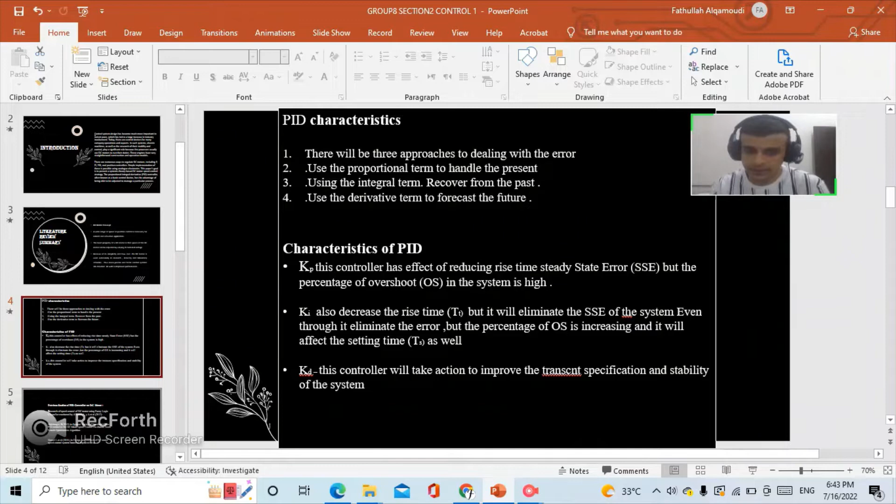So for the last one, Kd - this controller will take action to improve the transient specification and stability of the system.

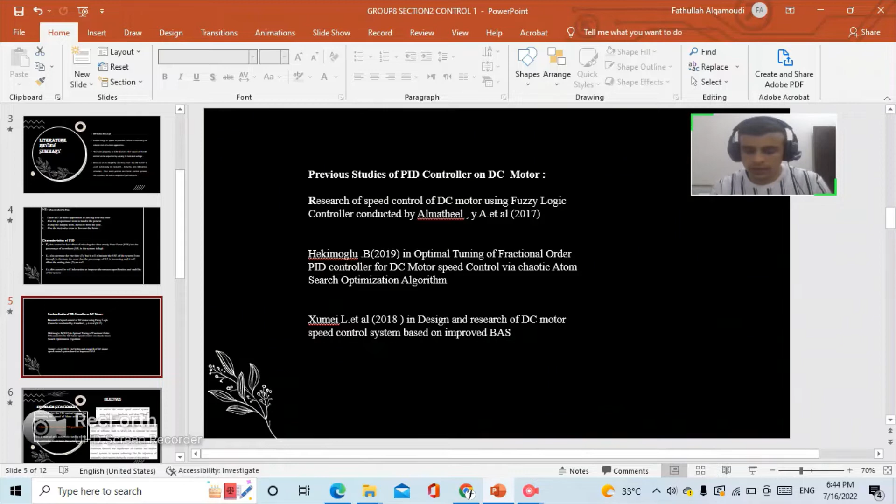Number two, optimal tuning of a fractional order PID controller for DC motor speed control via the chaotic atom search optimization algorithm. The last one: design and research of DC motor speed control system based on the improved BAS.

Problem statement: how to design the PID control system to control the speed of the blade with the DC motor as an actuator.

Secondly, how to determine the PID gain of the system. Third point, does manual and automatic tuning of the PID controller give the same result?

The objective of this project is to resolve the motor speed control system using the theory, methods, and ideas covered in class lectures.

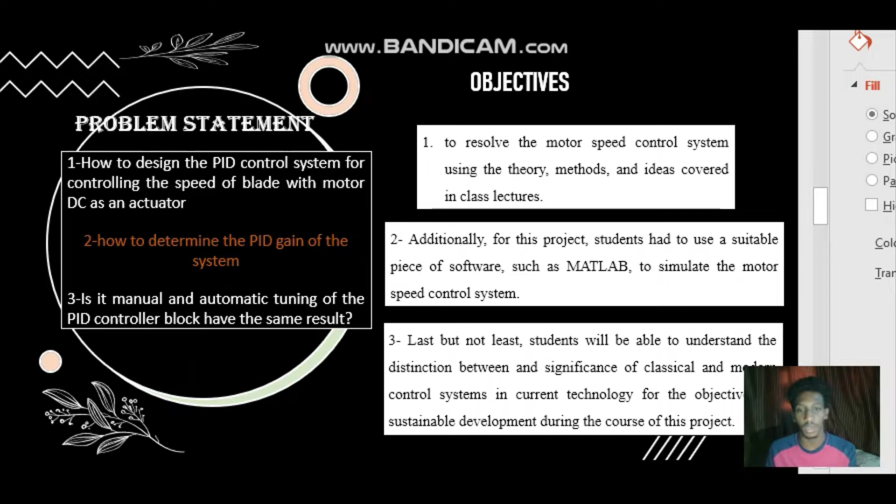Additionally, for this project, students had to use suitable software such as MATLAB to simulate the motor speed control system. Last but not least, students will be able to understand the distinctions between and significance of classical and modern control systems in current technology, for the objective of sustainable development during the course of this project.

The methodology to execute our problem: we provide a methodology in flowchart form, starting with establishing project goals and continuing until we get the actual system to control the speed of the DC motor using a PID controller.

In the project instructions, there is a list of parameters that we must follow to get the results. After results are collected, a discussion will be held among the members.

This is a flowchart of the methodology. The control goal is to control the speed of the blade with a motor DC. Firstly, establish the control goals and identify the variable to be controlled. Then write the specifications.

Then establish the system configuration and obtain a model of the process, then describe a controller and select key parameters to be adjusted. Then optimize the parameters and analyze the performance.

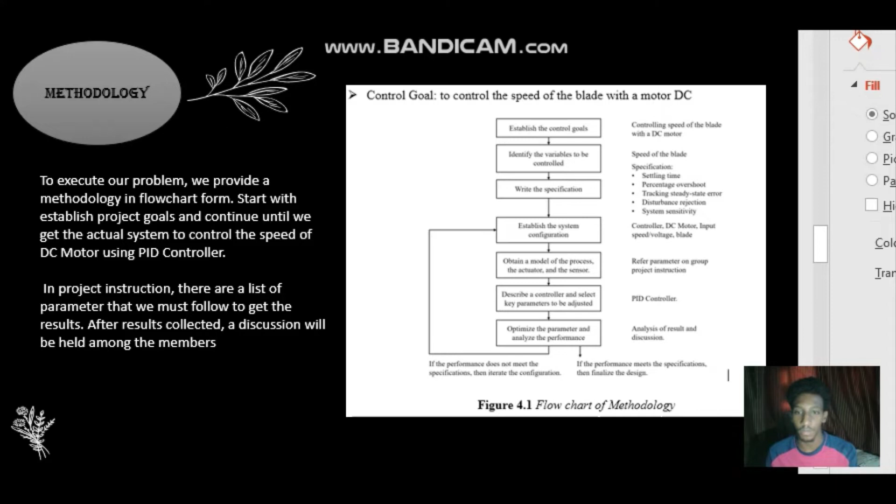And if this performance meets the specifications, then we will proceed with the design.

So here for the part on mathematical modeling of the DC motor. The figure shows us the equivalent circuit of the DC motor.

And the equation VA equals IA RA plus LA dI divided by dt, where VA is armature voltage, IA is armature current, RA is armature resistance, LA is armature inductance, and EA is back EMF voltage.

So here, by substituting E equal to Kb omega T into equation one, the electrical part will be Va t equals IA RA plus LA dIA divided by dt, plus Kb omega T. So for normal operation, the developed torque must be equal to the load torque plus friction and inertia.

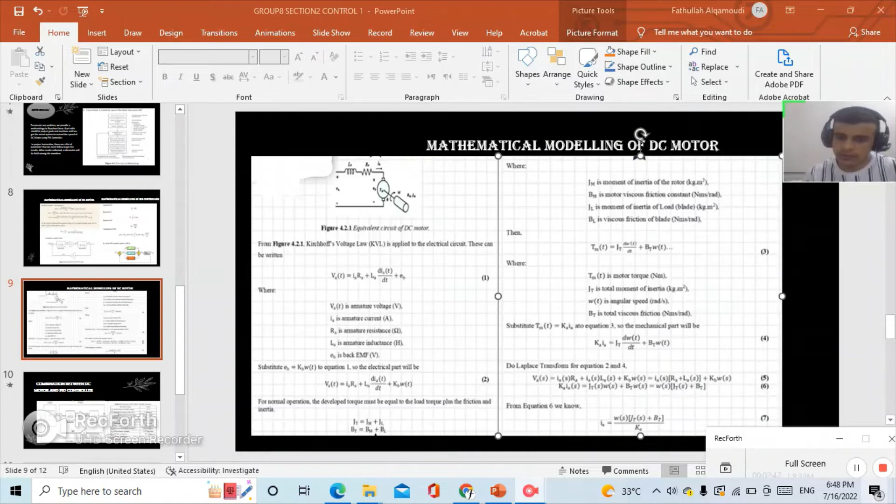Bt is the total friction. So here, substituting the Tm equation, the mathematical model will be Ka IA equals Jt d omega divided by dt plus Bt omega.

Okay, for the combination between the DC motor and PID controller. After we combine the two items, we have a controller and DC motor. We must use a closed loop system, with unity feedback constant, and besides that, I have the parameters used. Okay, that's all.

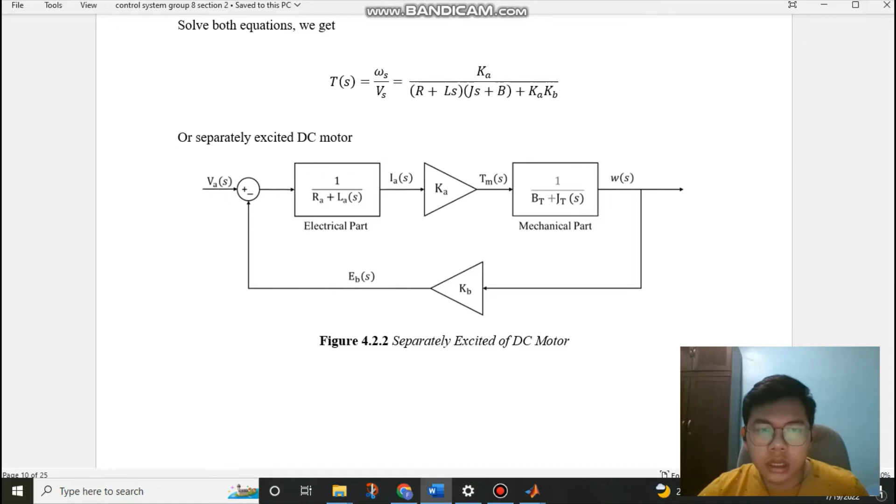So this is the block diagram that we use in our MATLAB to obtain the result and run the simulation. Now I'll explain the parameters of this motor transfer function.

This is the component in the circuit that we use. We have the rated motor terminal voltage, which is 24 volts, the moment of inertia of the rotor, moment of inertia of the load.

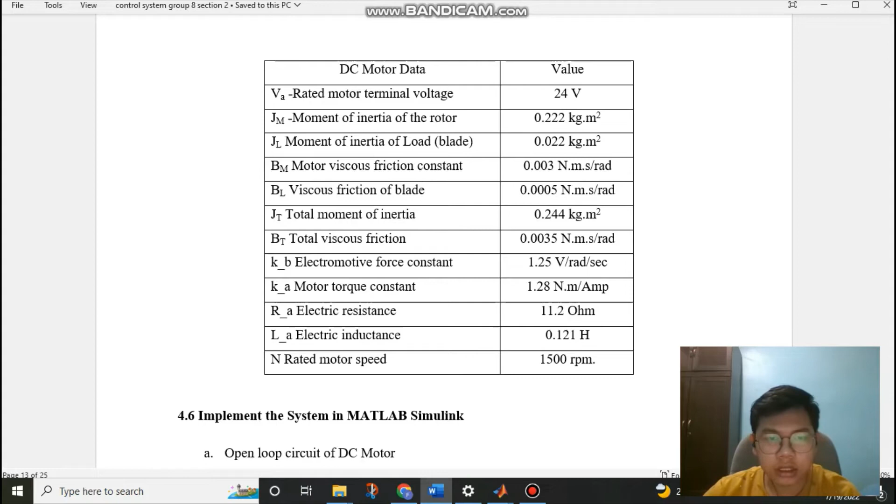Motor viscous friction constant, viscous friction of the load, and total moment of inertia, total viscous friction, the electromotive force constant, which is 1.25 volt per radian per second, and the motor torque constant, electric resistance, and electric inductance, and lastly the rated motor speed, which is 1500 rpm.

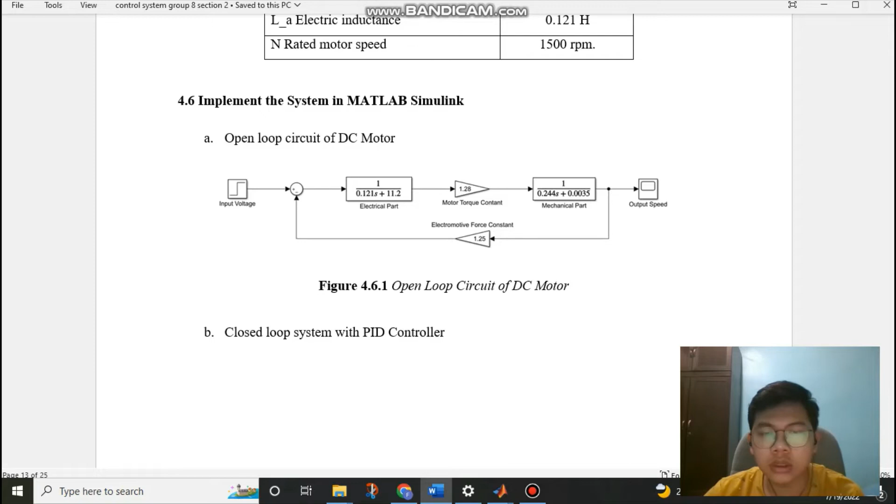So we implement the system in MATLAB Simulink, using this circuit to do the simulation. This is the open loop circuit of the DC motor, and the closed loop system with the PID controller. We just add the PID here to do the simulation.

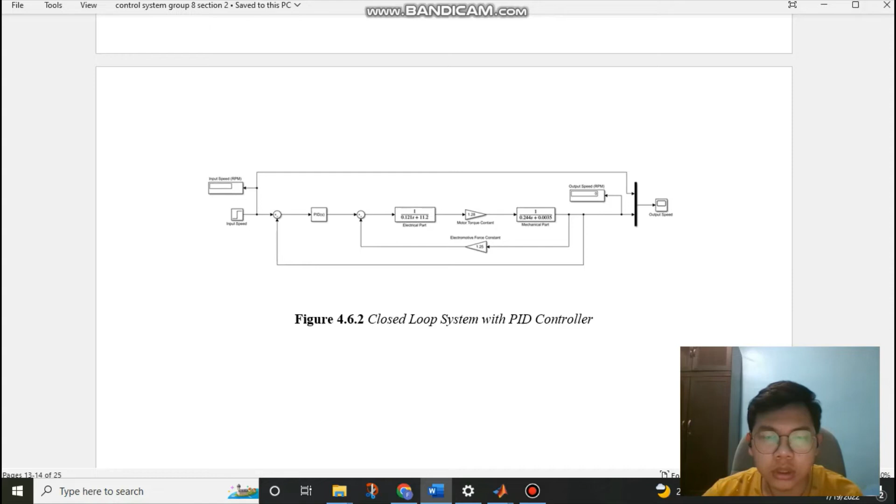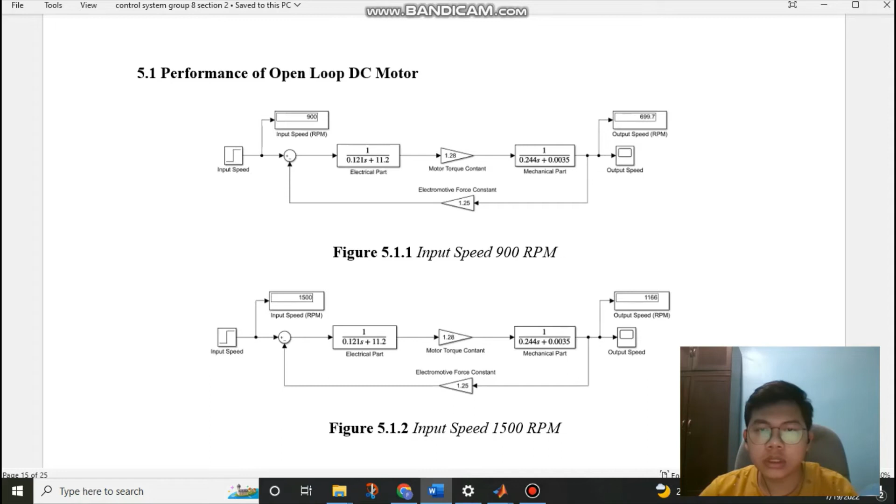So for the results and discussion, the performance of the open loop DC motor: the input speed is 900 rpm. As it goes through the electrical part, the motor torque constant, and the mechanical part, the output seems to be 699.7. And the next one, the input speed is 1500.

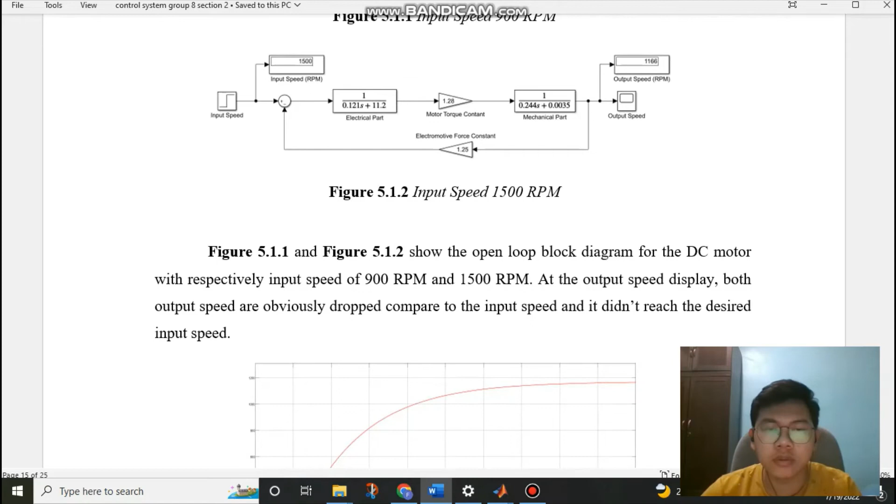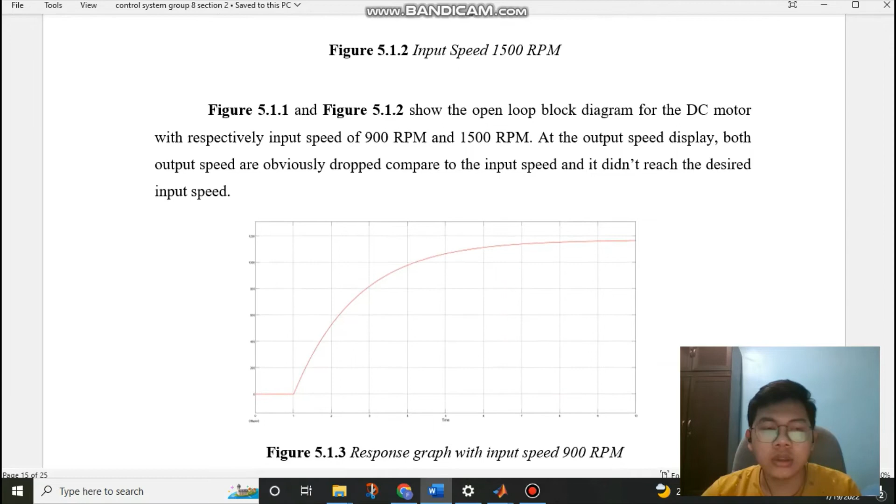So the output speed is 1166. So the open loop block diagram for the DC motor is tested with respective input speeds of 900 rpm and 1500 rpm. Both output speeds obviously drop compared to the input speed, so it did not reach the desired input speed. As you can see, this is the response graph with input speed of 1500 rpm.

As you can see, it did not reach up to 1500. It only reached somewhere between 1000 and 1200 rpm, so it did not reach the input speed.

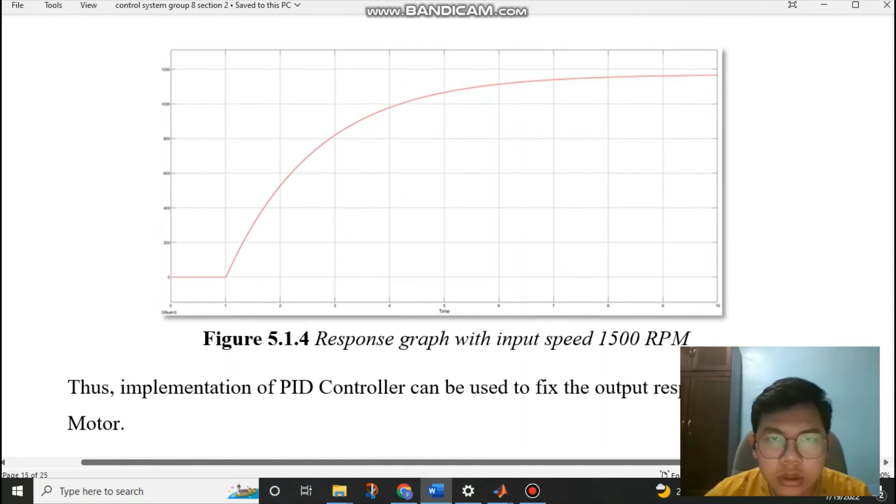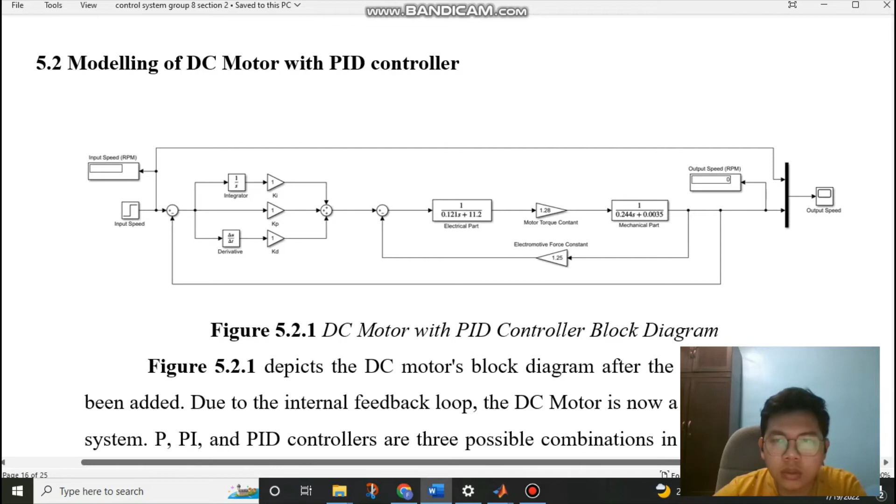So because of that, we use a PID controller for the DC motor to get the output speed that we want matching the input speed, so it reaches the same amount of input speed when we run the simulation. This circuit is basically the closed loop after we add the PID controller.

We use three possible combinations: P, PI, and PID. For the P, the KP is 250. For PI, the KP is 15, TI is 1.5, and KI is 10. For PID, KP is 50, TI is 1.11, KI is 45, TD is 0.06, and KD is 3.

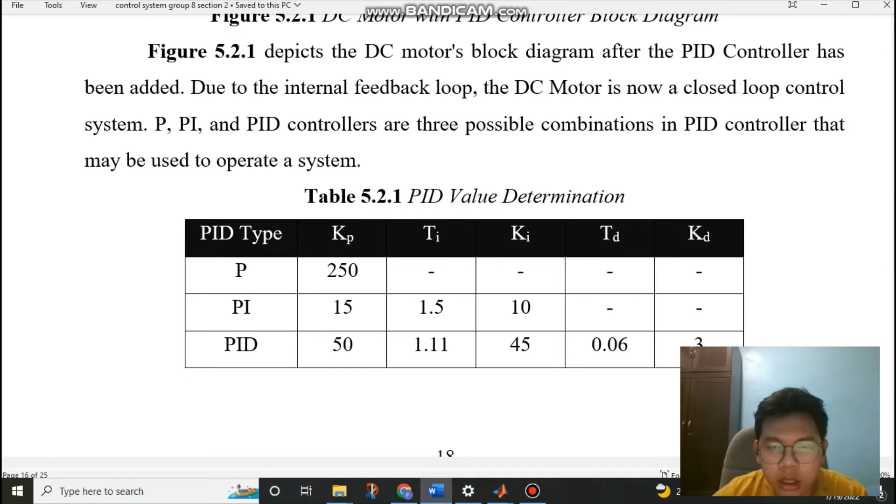We input this value into the simulation into the PID controller to get the result, and we show it into a graph. So this is the graph that we obtain after we run the value in the table before.

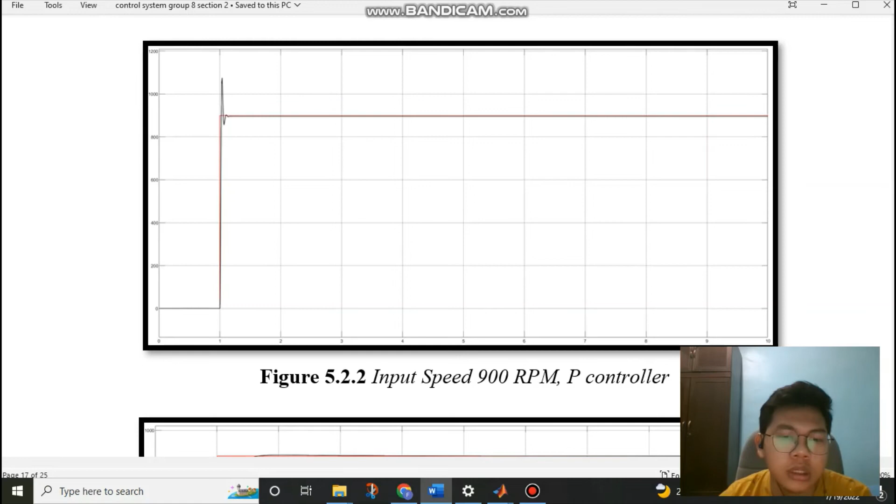The big quantity of KP is used to increase the output speed as much as possible in order to obtain the required speed. So after adding the PI controller, the value of KP may be gradually lowered using the integral controller, since the integral will minimize the steady state error to obtain the desired output, where KP is 15 and KI is 10 for the PI controller.

So last but not least, the PID controller, by adding another derivative controller, which is KP equal to 50, KI 45, and KD to 3, we may extend the response rising and settling times. So the DC motor becomes steady and stable.

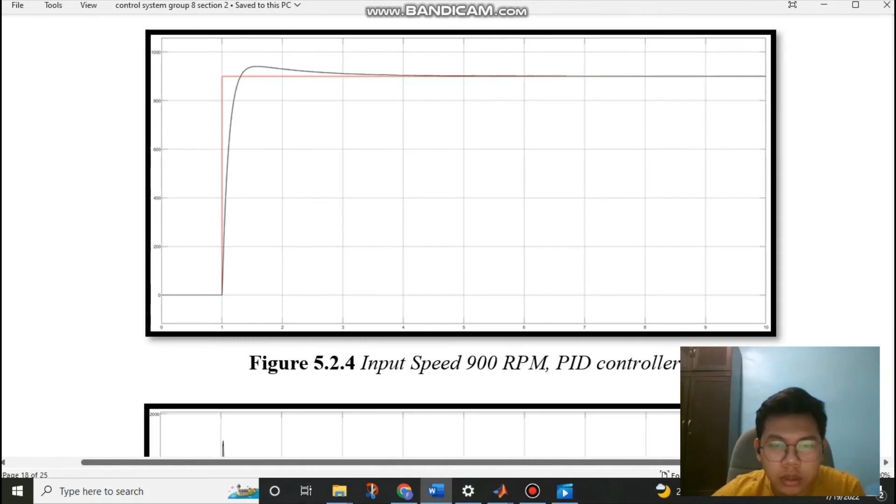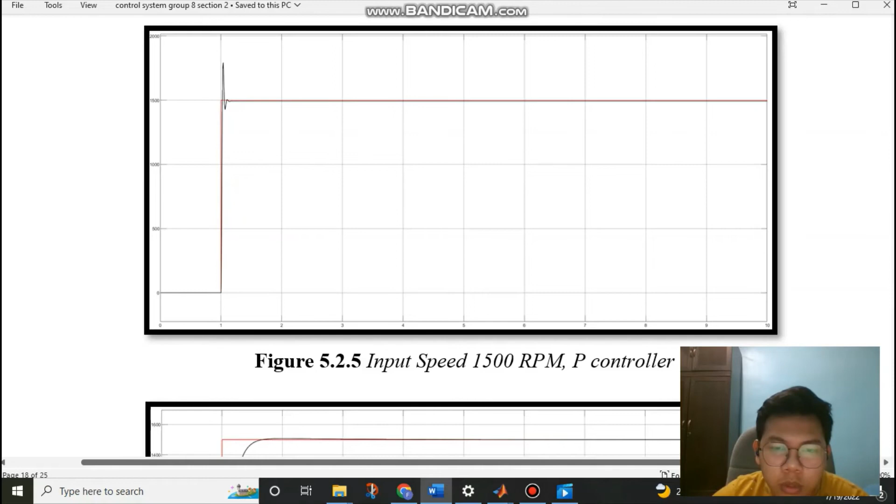So the graph that we obtain from the input speed of 900 rpm seems to be the same as when we use the same controller, which is the P controller, for 1500 rpm. The value overshot a little and then became constant, same as input speed for 900 rpm using the P controller.

So for the PI controller, the value slowly and steadily went up and became constant, while using the PID controller for 1500 rpm, it overshot a little and became constant.

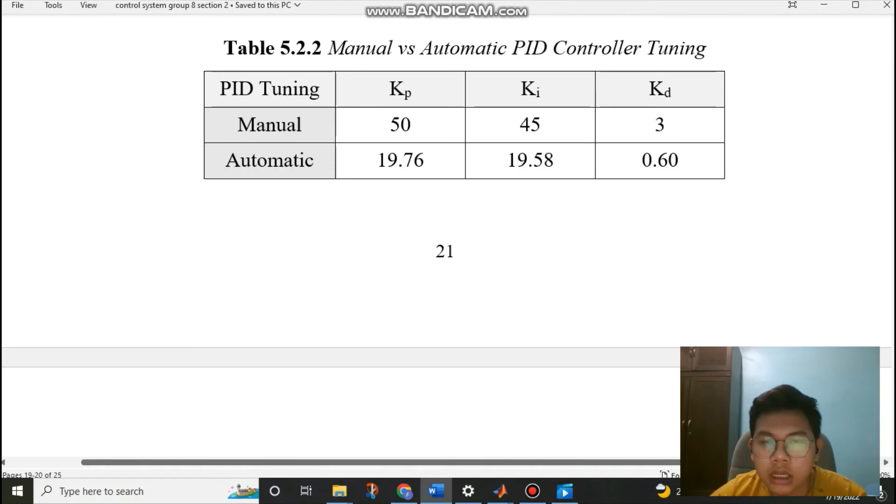We tried to differentiate between manual and automatic PID controller tuning to see which is more precise in calculating the result. For the manual tuning, we use KP 50, KI is 45, while KD is 3. For the automatic, we obtain KP is 19.76, KI is 19.58, and KD is 0.6.

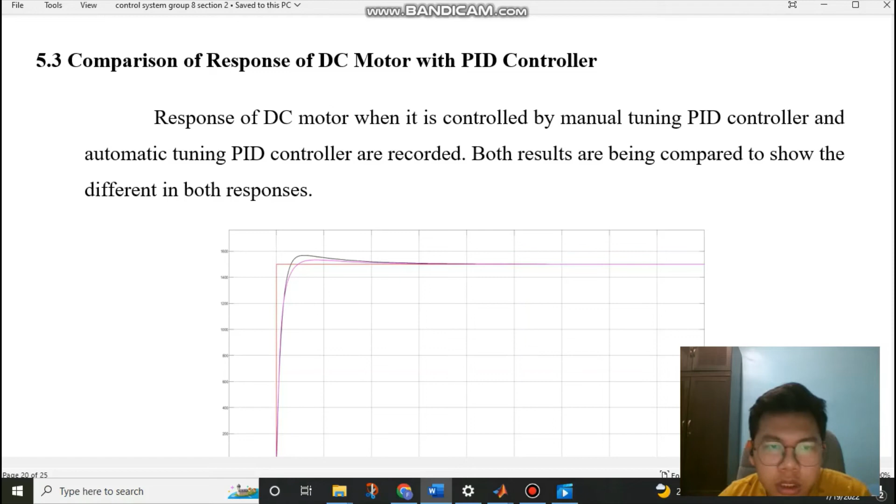This is the result that we compare after inputting the values from the table, comparing the response of the DC motor with PID controller using manual tuning and automatic tuning. In the graph, the black one is the manual tuning and the pink one is the automatic tuning, and the black one overshoots more than the pink one. So we can see that automatic tuning is the best if we want a more precise result.

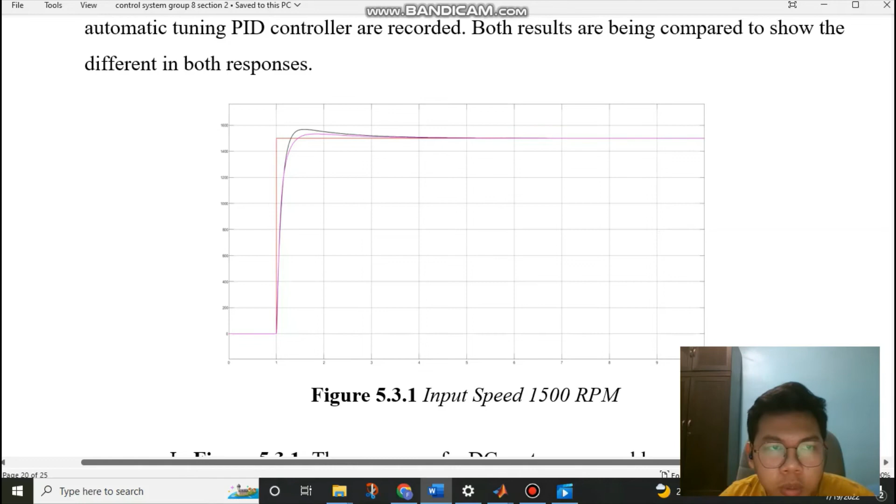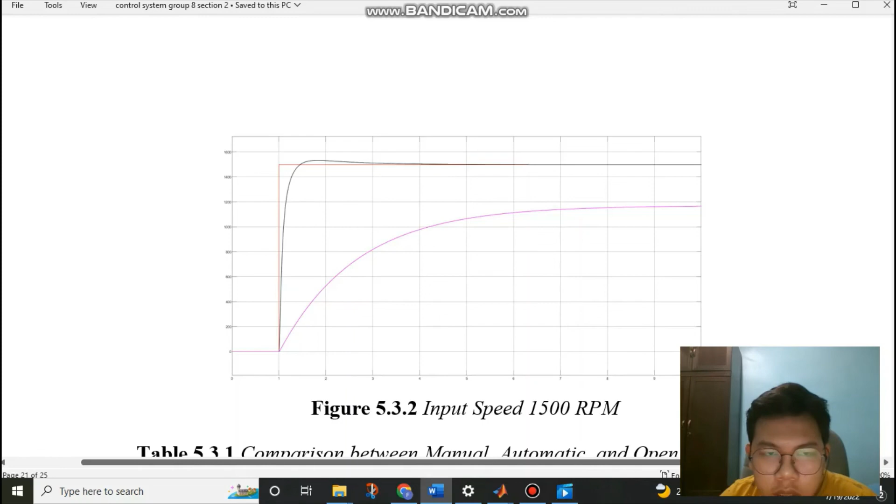So we will compare between the open loop and closed loop in the DC motor. The bottom one is the open loop and the other is the closed loop, which uses the PID controller. The open loop did not even reach the input speed of 1500 rpm, while the closed loop overshot a little. So this is the comparison between manual, automatic, and open loop results.

For the overshoot, we obtain manual is 4.53 and automatic is 2.07, while open loop did not reach the input speed at all.

For the rise time, the manual needs 0.189 second to rise to the maximum input speed, the automatic 0.2 second, and the open loop 3.581 second.

I think that's all for the result and discussion and the simulation. Thank you.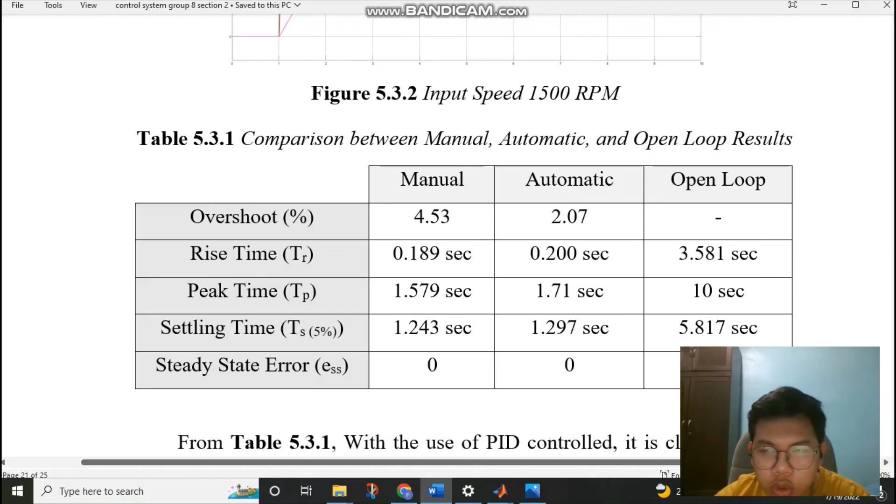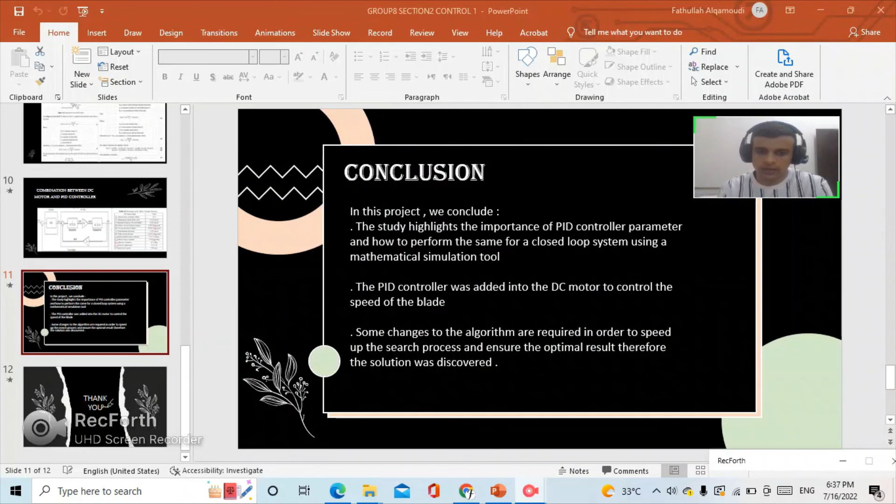For conclusion, in this project we conclude the study highlights the importance of PID controller parameters and how to perform the same for a closed loop system using a mathematical simulation tool. The PID controller was added into the DC motor to control the speed of the blade. Some changes to the algorithm are required in order to speed up the search process and ensure the optimal result. Therefore, the solution was discovered.